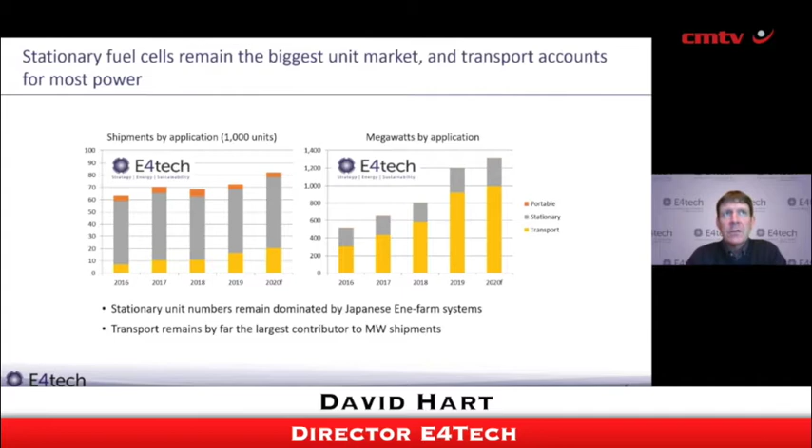Despite all of the difficulties in 2020, there was still an increase in fuel cell shipments that took place. So we collect data from all of the companies in the fuel cell industry, or at least we contact all of them, and the vast majority are happy to share with us. And so these are primary research figures which we have gathered and put together. We have to anonymise them, so unfortunately we're not allowed to tell you very much of what lies behind this.

But we cut them in three different ways. So this is one of three graphs which I'll show you. This first slide is about shipments by application and megawatts by application. As always, we do this for two reasons. The shipments gives you the number of units, and sometimes that can be dominated by very, very small units for portable power, for those kind of things.

The megawatts is what drives cost in the industry, what drives the supply chain in the industry. So that's why we show it two ways. And you can see they're very different. So whereas there are quite a lot of portable shipments, they account for almost none of the power, which is logical. They're very small. They're in the hundreds of watts, even the tens of watts of unit size.

There are two or three things that I want to pull out of this, though. Very sort of stark, not very exciting figures on the face of it. But you see they're rising. We had hoped, we had anticipated that the 2020 figures might even be double the 2019 figures. We had seen indications of policy support, of ramp up in manufacturing that would be appropriate to have that doubling of output. Very unfortunately, of course, COVID had a significant impact.

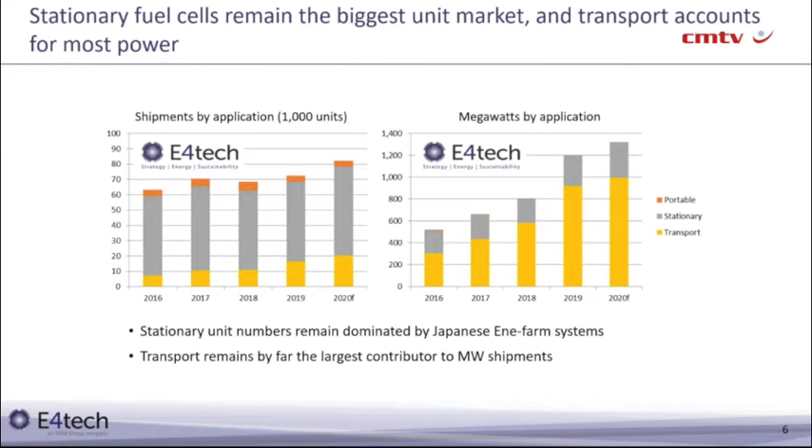It had a significant impact on supply chains. So factories were running at partial capacity. It was difficult to find people. It was difficult to do shipments. So a lot of orders were set back. And of course, more generally, there was less economic activity in certain sectors. So there was a pullback. But still, we saw more shipments.

Two things to pull out here. The transport units are the ones which dominate power. The Toyota Mirai is part of this shipment category. The Hyundai Nexo is another very important part of that. And that is really valuable because that drives this supply chain cost. So the automotive manufacturers are the ones that put together the supply chains. They are the ones who know how to drive cost out of processes.

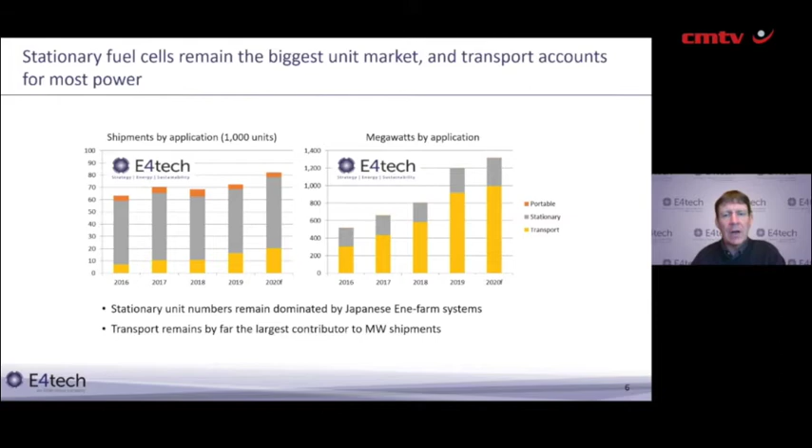On the stationary side, we see a lot more units, as you'll see on the left-hand chart, but comparatively little power reflected in those numbers of units. That's because 350,000 cumulatively of those units, so about 45,000, 50,000 last year, were 1 kilowatt units which went into Japanese apartment buildings. So it's a very established market. It's about 50,000 a year. It's something which is economically competitive. It's not cheap, but it's something which works in the Japanese context.

Those are the ones which dominate the power in the chart that you just saw. But actually, what we're seeing is a change in emphasis away from light duty and more towards heavy duty and towards other applications of fuel cells. That doesn't mean by any means that it's going away. So I've just put up a few examples.

And even JLR, which has been not very bullish about fuel cells in the past, has also announced a fuel cell Range Rover that is going to be testing in the coming months. So there is a movement in light duty vehicles still, but it's not as pronounced as it has been in the past. What's really interesting is in heavy duty. And here I've categorized it in two ways. One is in buses and one is for larger trucks.

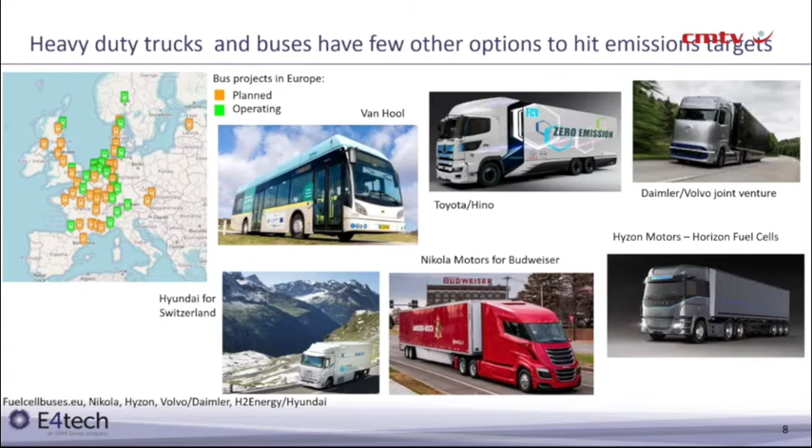And you have upstarts. So Hyzon Motors, many of you may have seen the announcement last year, I think actually early this year, where Hyzon Motors, through a SPAC, raised roughly 2.5 billion, or at least the SPAC was valued at roughly 2.5 billion, and they raised a lot of money to commercialize this ground up fuel cell truck prospect, where they've built cells and stacks. They've got a history of doing that.

They're based out of China and Singapore, and they've now moved into the downstream integration of those into trucks. And the first few trucks are just starting to be rolled out, but they have an ambitious timescale. So there's an awful lot going on, and that means that there's an awful lot going on in the supply chain as well.

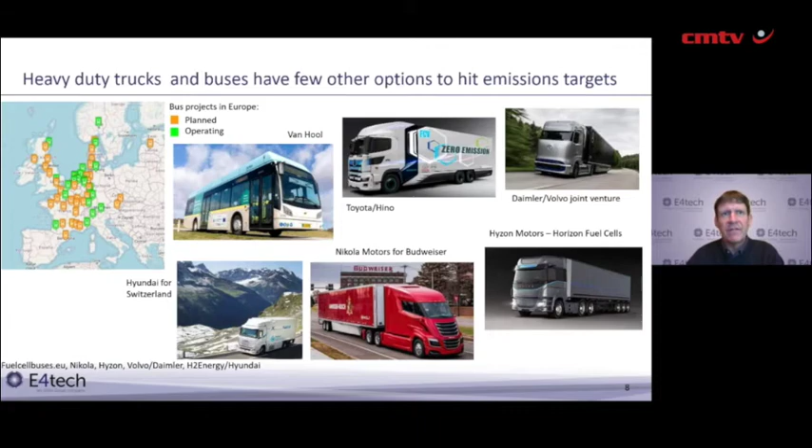So you see companies like ElringKlinger, like Faurecia and Michelin, all participating in developing fuel cells and building fuel cell factories to be able to service these heavy duty options.

And that will also be going into service in the Netherlands, in Italy, in France. There are announcements in California, the UK, Korea. So this is something which has grown really somewhat unexpectedly. But again, it's about net zero, it's about decarbonisation.

You will all know, I'm sure, about the Anglo-Ballard mining truck tie-ups, but of course there are others, and there is a lot of interest from the mining industry in decarbonisation, but also in reducing reliance on, for example, volatile diesel prices. So there are plans in place for people to think about how to use renewable energy in remote mine sites, not only for above ground, but also for producing hydrogen, also for below ground vehicles. So a lot going on.

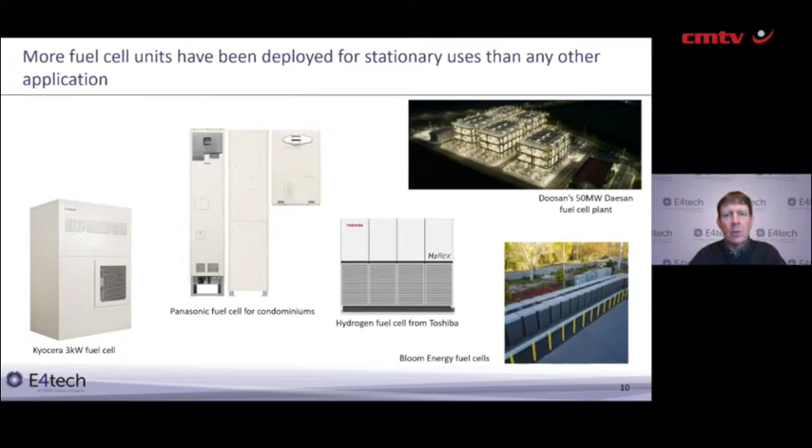That's really because of the transport opportunity, and that will only continue to grow. But solid oxide is a very strong contender for stationary applications and for some of the bigger transport applications such as shipping. So we will see more in that area. And I think PEM and SOFC will be the ongoing main players, though we will continue to see one or two others. Alkaline fuel cells and phosphoric acid and molten carbonate will all be there somewhere in the mix, but at much smaller levels.

We will now move to Gary Kendall, who will give us a few views on the role of hydrogen in the net zero economy. I'm really talking about the role of hydrogen in the net zero economy, not specifically the role of hydrogen fuel cells.

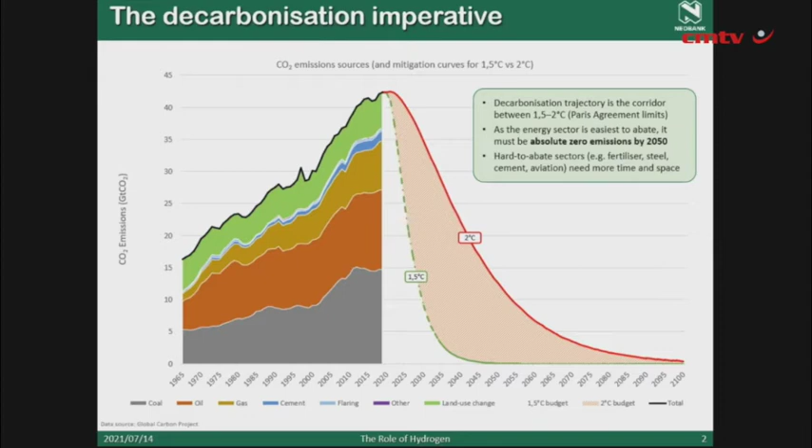And we can't do this. We can't achieve this trajectory by disaster. We have to do it by design. And since the energy sector is by far the easiest to abate, it must be absolute zero by 2050. So all this talk about net zero, the net is for residual emissions from hard to abate sectors. The net is not for us to continue burning fossil fuels in energy applications where an alternative exists.

So 3 main buckets of intervention. One is we have to ruthlessly eliminate wasteful energy consumption. That's the first bucket. The second bucket is that to the extent that we enjoy energy services, we have to pursue really hard progress on energy efficiency, both on the supply side and the demand side. And then, of course, we have to fully decarbonise the energy system. So we have to eliminate fully the coal and the oil and the gas and replace them with renewable energy resources, primarily wind and solar.

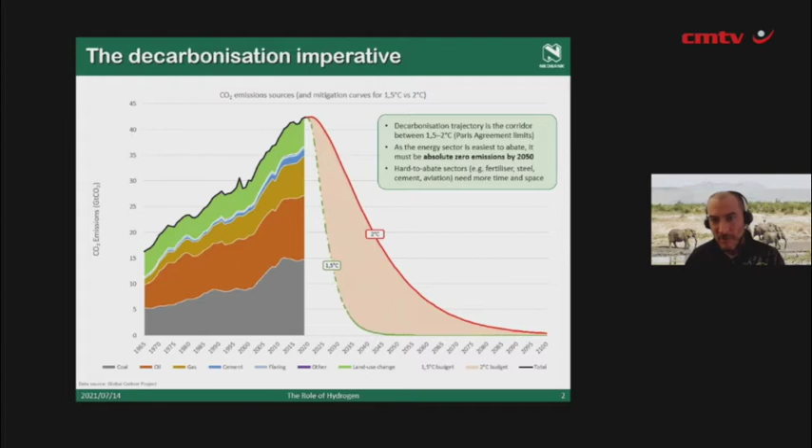So this requires, as I said, to meet the Paris objectives, really a net zero economy by the middle of the century. That's achieved when sources of emissions and removals by sinks balance to zero. Some emission sources are comparatively easy to abate, both through behavioural changes, as I've alluded already, and through existing affordable technologies. And other emission sources might be hard to abate because the prospects for behavioural change are difficult and technologies are either expensive or non-existent. And that includes things like fertiliser, steel, cement, aviation and shipping.

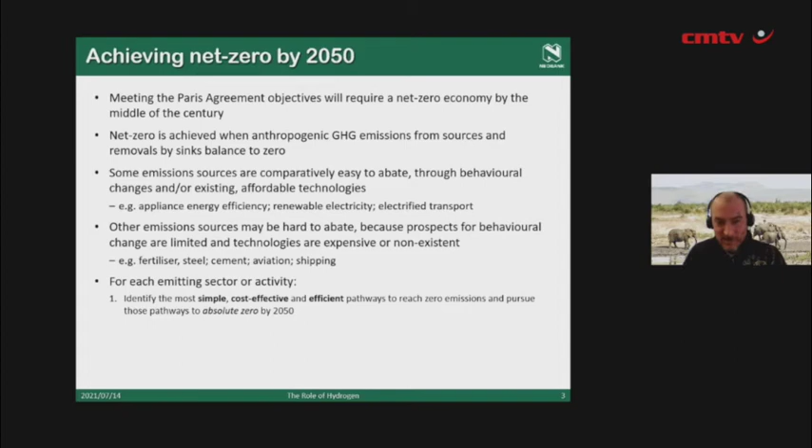Now, for whatever sector we're looking at, the first most important thing we have to do is identify the most simple, cost-effective and efficient pathway to reach zero, and to pursue those pathways aggressively to get to absolute zero by 2050. And then, as I said, the residual emissions, what's left over that we can't figure out how to do, that's where we have to start invoking magical thinking and things like direct air capture, CCS and nature-based sinks.

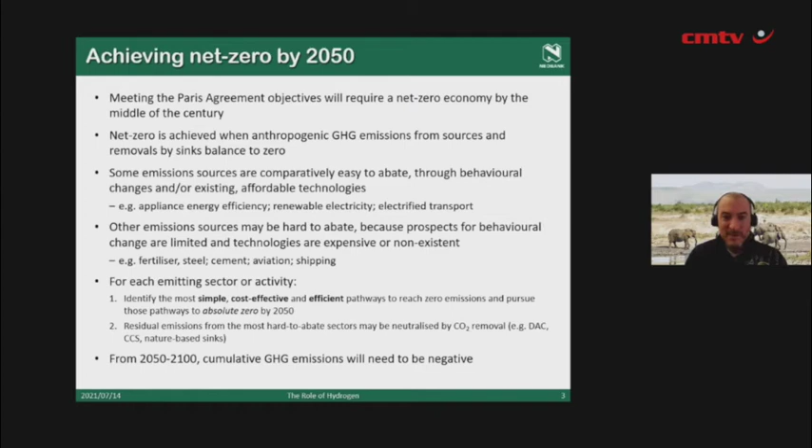Now, remember, of course, this net zero condition by 2050, we've likely overshot the carbon budget already because of the inertia in the system. Net zero is a fleeting moment in time towards absolute negative emissions. So in the second half of this century, from 2050 to 2100, cumulative emissions will need to be negative to approximately the same extent that we're currently emitting.

So where does hydrogen fit into all this? Firstly, you'll often hear that hydrogen is the most abundant element in the universe, and so what's not to like? Well, firstly, it's not an energy source, it's an energy carrier. So think of it like electricity, not like coal or oil or gas. It's a carrier of energy. It's also a very important chemical feedstock, so it has non-energy uses. As I say, it's the most abundant element in the universe. This is true, but it's almost never found on Earth in its elemental form.

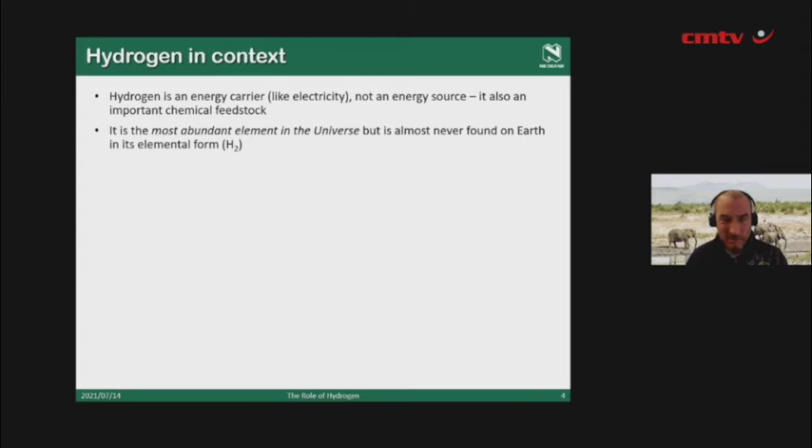And so arguing for hydrogen on the basis of its universal abundance is like arguing for electrons on the basis that there are a lot of electrons in the world. And it's true that we don't have a shortage of electrons in South Africa. We have a shortage of electricity. And so, as I say, the abundance of hydrogen is irrelevant because it has to first be generated, just like electricity, in processes that involve energy losses, which is important.

If the primary energy source is a fossil fuel, then hydrogen production emits CO2. Hydrogen today is mostly produced from fossil fuels, mostly natural gas and to a lesser extent coal, with some additional hydrogen captured as a byproduct of other industrial processes. If the primary energy source is renewable electricity, which happens through electrolysis of water, then supply side and demand side efficiency is the critical consideration. So if we're only talking about green hydrogen, then the only thing we need to think about really is how efficiently we're delivering energy services with that green hydrogen.

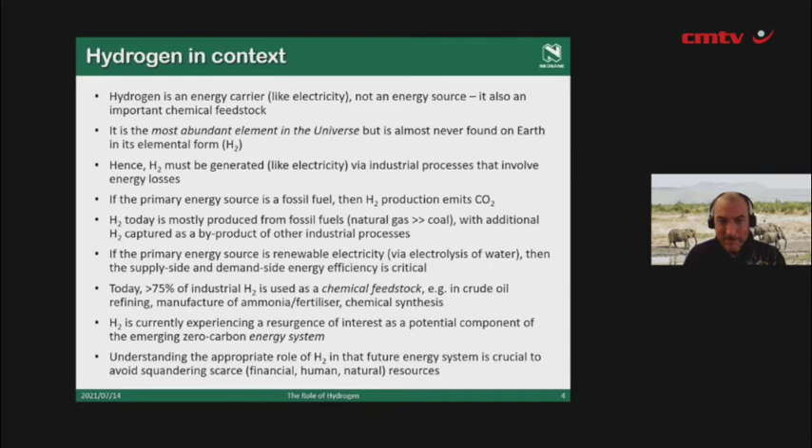So today, 3/4 of industrial hydrogen is used as a chemical feedstock, not as an energy source. It's used in crude oil refining, in the manufacture of ammonia fertilizers, and in chemical synthesis. And it is currently experiencing a resurgence of interest, as you've just heard, as a potential component of the emerging zero carbon energy system. But understanding the appropriate role of hydrogen in that future energy system is crucial to avoid squandering resources. And I mean by that financial resources, attentional resources. The amount of time that we spend talking about dead ends is important, and of course natural resources too.

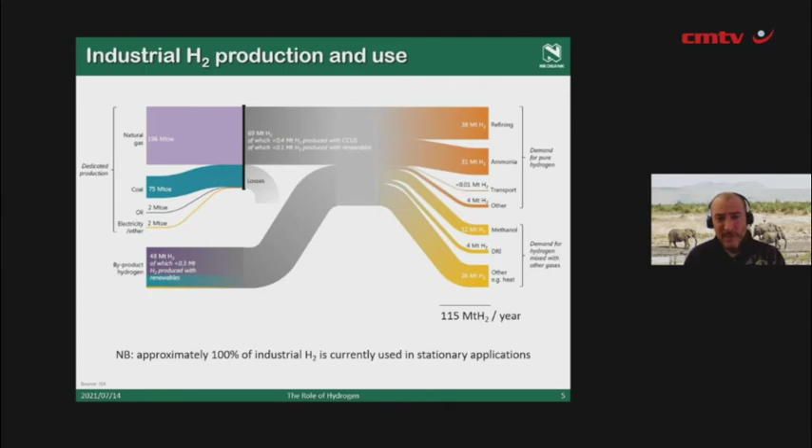So to give you a picture of what industrial hydrogen production currently looks like, we're producing just over 100 million tons of hydrogen a year. You can see on the left-hand side, almost all of it's coming from fossil fuels, mostly natural gas, and to a lesser extent coal, and a tiny fraction from electricity. And then on the other side, you can see where it's used. Let's see if I can get my pen working. I'll draw your attention to this one, because this is the one here where most of the conversation is dominated.

And what I would ask anyone who's proposing hydrogen as a solution for zero carbon transport is, what are we going to do about this? What are we going to do about all of this? So we've got to really seriously think about how and where hydrogen is going to be used. And at the moment, as you can see, this number here is trivial, and approximately 100% of hydrogen supply currently is used in stationary applications, not mobile applications.

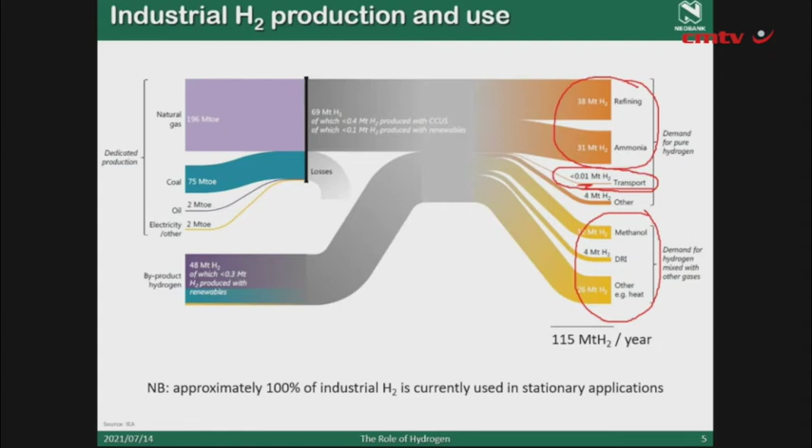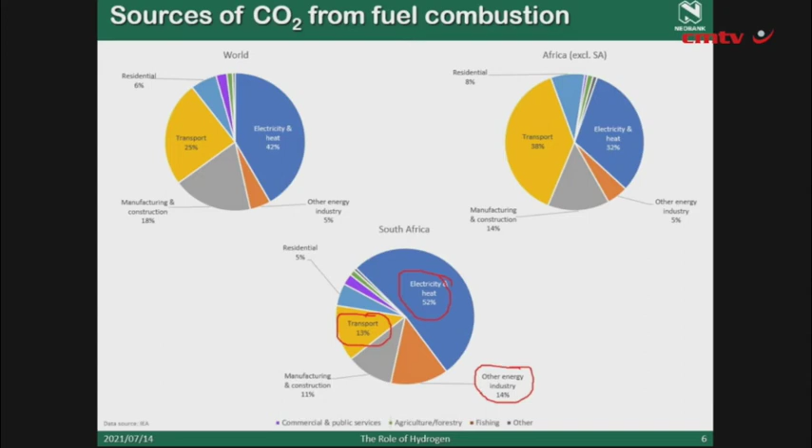So the task at hand is to eliminate emissions. And this is where CO2 emissions from fuel combustion come from in the world. This is Africa, this is South Africa. So let's talk about South Africa. You can see most of the discussion so far has been about transport. So we're talking about 13% of the emissions problem in this country. Electricity and heat, we can obviously use renewable electrons there. Other energy industry, there's a slight trick of the light here because most of that is Sasol, which is mostly going into transport. So what about automotive transport?

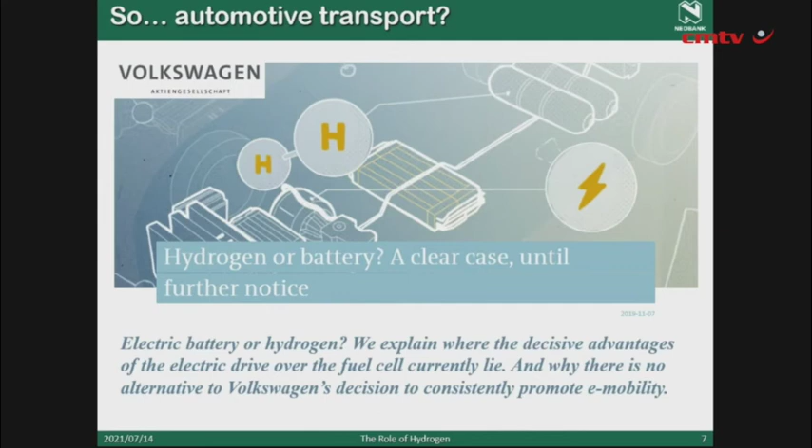So let's have a look at the largest automotive manufacturer in the world. This is taken from Volkswagen's website: "Electric battery or hydrogen, we explain where the decisive advantages of the electric drive over the fuel cell currently lie and why there is no alternative to Volkswagen's decision to consistently promote e-mobility." And the main reason is that electricity thrashes hydrogen on energy efficiency. And since energy efficiency is one of the primary considerations, given the trajectory that we have to follow, this is very important.

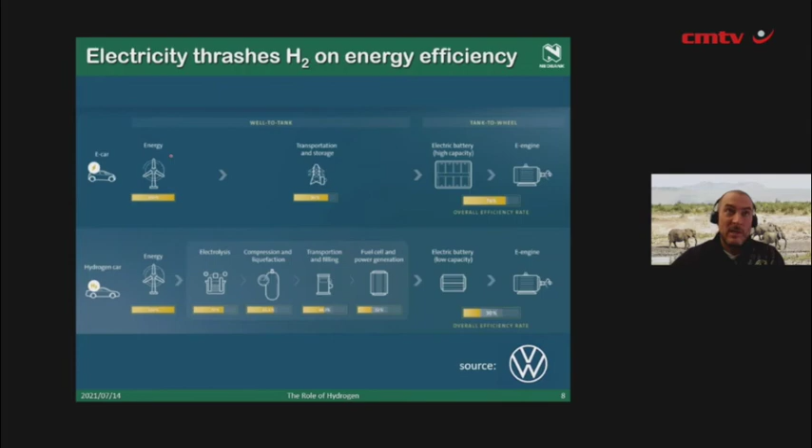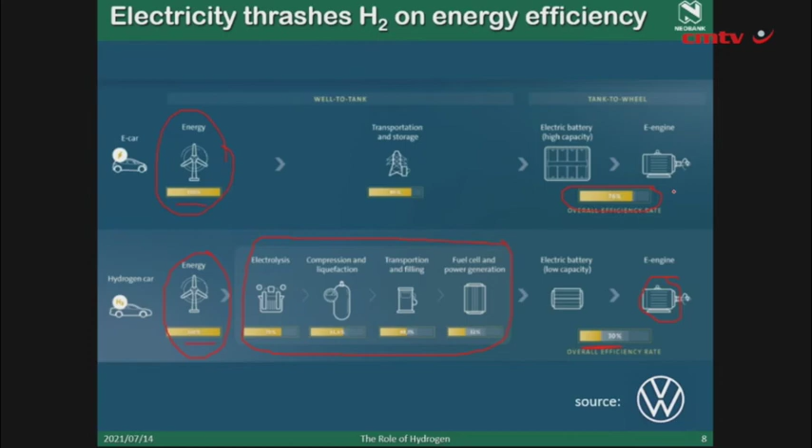If you're starting with renewable energy in both cases, depicted here by a wind turbine, so we have 100 units of renewable energy in both cases, you can see that the hydrogen pathway has all of these additional losses before you actually get to the vehicle. And so you end up with only 30% of the energy from the wind turbine driving the wheels. And on the battery electric pathway, 76% of the energy is driving the wheels. So you've got 2.5 times greater energy efficiency on the electric pathway. So you could be forgiven for thinking, though, that there's a format war going on, right?

Okay, so that's light-duty vehicles, but what about heavy-duty vehicles? This was questioned in the last presentation as electricity can't do it. Well, Shenzhen in southern China, with population approaching 12 million, has a lot of buses. In fact, it has over 16,000 buses. And at the moment, every single one of them is battery electric.

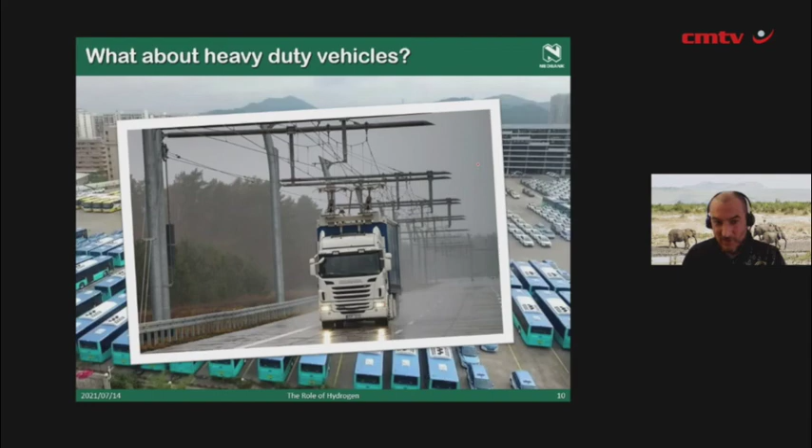So what about trucks? Same story. It's been mentioned that Scania in particular believes that it's possible to electrify heavy goods vehicles. And I happen to concur with their view. So Scania sees the future very much electric. In the future, every transport can be electric. Although the shorter transports will be electrified first, as power infrastructure improves and batteries become more efficient, lighter, cheaper, electrified range and capability will keep extending.

So why the enthusiasm then for hydrogen in road transport? This is going to sound conspiratorial, but it's not. It's about incumbency and it's about vested interests. Now, this isn't on its own a disqualifier. It's just important to understand and evaluate the arguments in favour, to understand where they're coming from and which interest groups are presenting those arguments. Because just because something is legal and profitable does not mean it is in the public interest. And so many of the problems of our socioeconomic system are the misalignment between the private profit motive and the general interest.

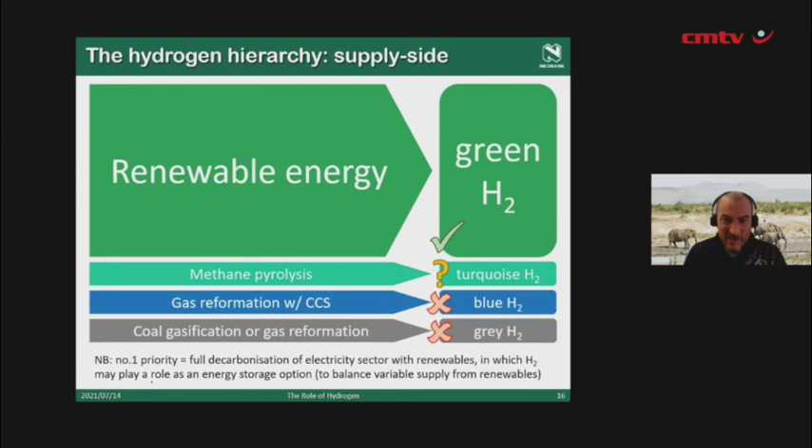The number one priority is full decarbonisation of the electricity sector with renewables, because that's the largest part of the emissions problem. And so if we're producing renewable electrons and then we're squandering them to produce green hydrogen to put into fuel cell vehicles or for anything else for that matter, while we're still using fossil fuels to generate electrons, that's actually nonsense on toast.

I want to leave with the conclusion, in case anyone thinks I'm beating up on hydrogen, that I see it's going to play a very important role in the future net zero economy. It's just not the one that has captured the popular imagination. We're going to need green hydrogen for chemical feedstocks, for fertilizer, methanol, for green steel production, for zero carbon fuel in aviation, and potentially shipping. Ammonia has already been mentioned. Potentially as an energy storage medium to help us get to a 100% renewable electricity grid.

And remember, as I said just now, all of these options imply hydrogen hubs, not hydrogen networks. And hydrogen should not be entertained in applications where direct electrification is simpler, cheaper, and more efficient. Hydrogen from fossil fuels is incompatible with net zero. Watch out for the bait and switch. And South Africa specifically should pursue hydrogen opportunities that cohere with its net zero objective as part of a clean, affordable, safe and efficient energy system.

Short term, we've got to rapidly scale up renewable and embedded energy. We've got to directly electrify the road transport system, both light and heavy duty. Medium to long term, green hydrogen for steel, fertilizer, chemicals and aviation and shipping. And the last thing, in case it hasn't been clear in my talk, is to remain alert to motivated reasoning from vested interests and incumbents who are often led to present hydrogen as a universal panacea, and it often comes along with natural gas as an imagined bridge.